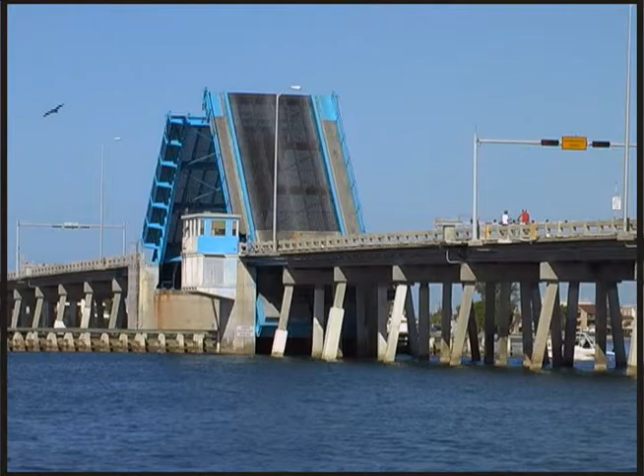Welcome to the Alternatives public meeting about a Florida Department of Transportation study to determine the future of Cortez Bridge on State Road 684, Cortez Road in Manatee County, Florida. The FDOT held a public kickoff meeting on April 30th, 2013 to introduce you to the Project Development and Environment, or PD&E study process.

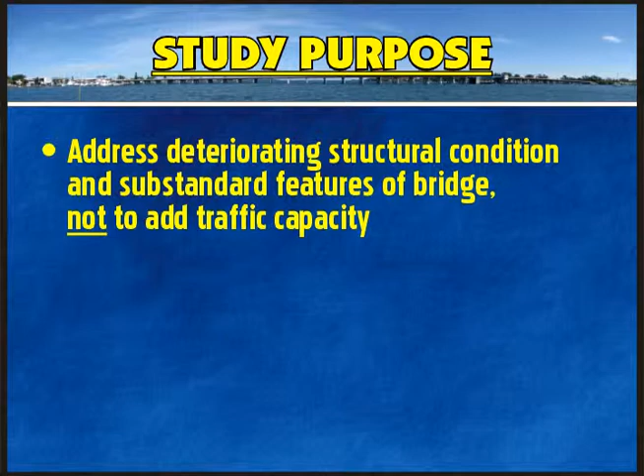We are following this process to determine the issues that are important to you as we conduct the study. The study limits are along State Road 684, Cortez Road, from State Road 789, Gulf Drive, to 123rd Street West, a distance of almost 1 mile. State Road 684 is a designated hurricane evacuation route. The purpose of the study is to address the deteriorating structural condition and substandard features of the bridge, not to add traffic capacity.

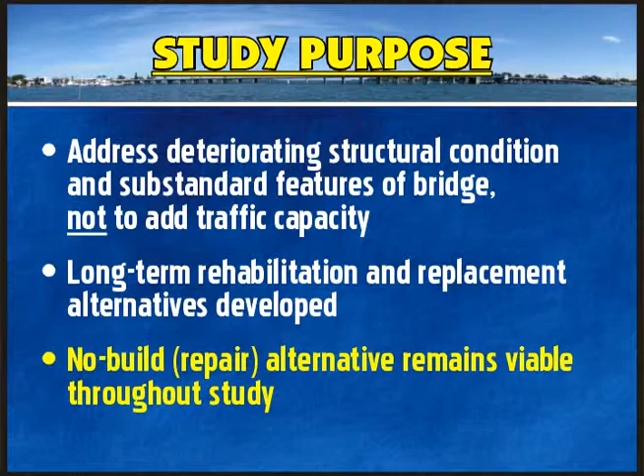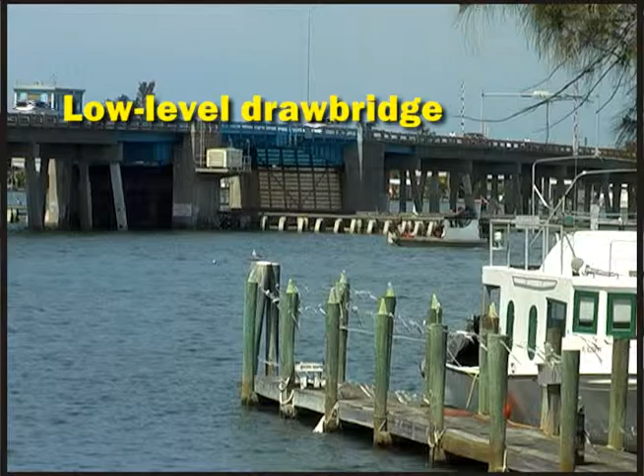The FDOT has developed long-term bridge rehabilitation and replacement alternatives. The no-build or repair alternative is also considered viable throughout this study. This PD&E study began in January 2013 and is scheduled for completion in summer 2015. It will conclude with a determination of whether the bridge is repaired, rehabilitated, or replaced. If the replacement alternative is selected, the type of bridge will be identified. An analysis of various two-lane replacement alternatives continues. FDOT is studying low-level drawbridge, mid-level drawbridge, and high-level fixed bridge designs. We also considered a tunnel alternative.

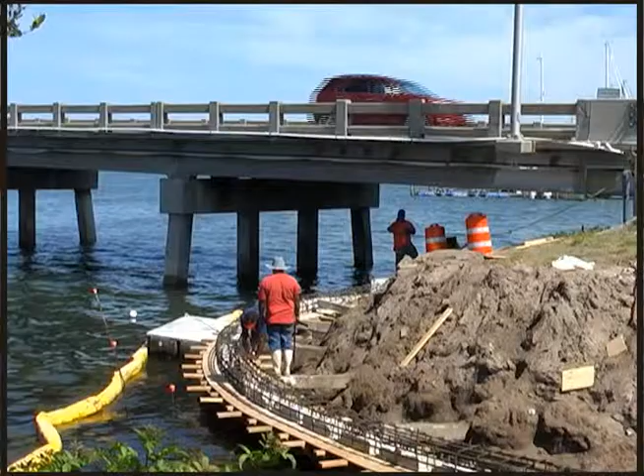The FDOT is currently doing a short-term repair project which began in May 2014 to keep Cortez Bridge safe and operable for up to 10 years, or until 2025. Please speak with an FDOT representative for more information about the repair project.

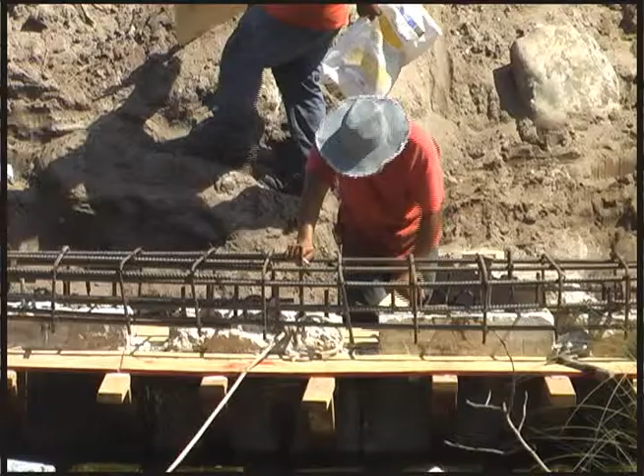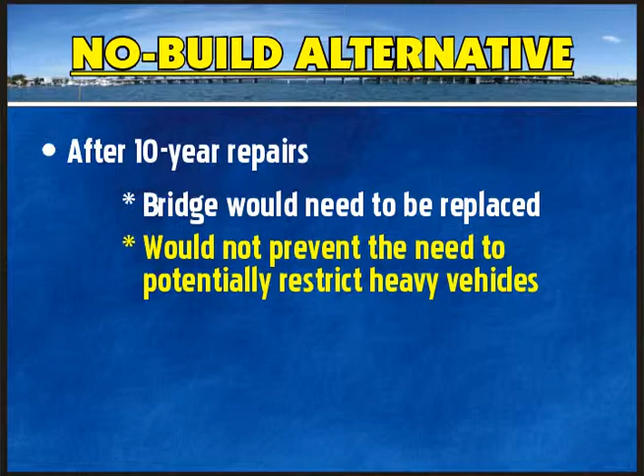Now, let's describe the alternatives under consideration. First, the no-build or repair alternative. While no one can precisely predict how long repairs will last, the no-build repair alternative includes continued repairs and routine maintenance of Cortez Bridge to keep it safe and operable for up to an additional 10 years following the current 10-year repair project, or until 2035. After the 10-year repair, the bridge would need to be replaced. The no-build repair alternative would not prevent the need to potentially restrict heavy vehicles, meaning that heavy trucks such as commercial delivery or moving trucks could be restricted.

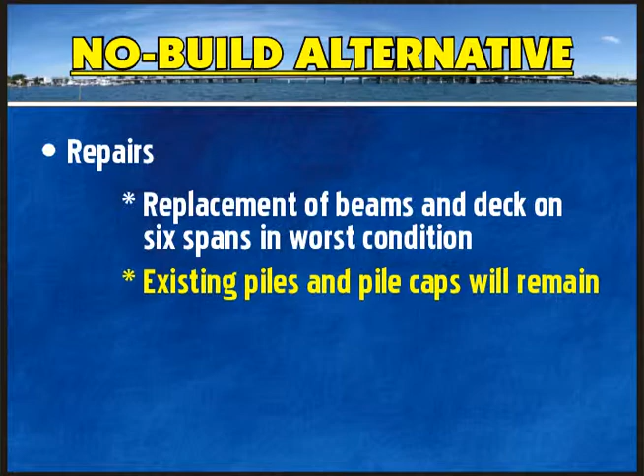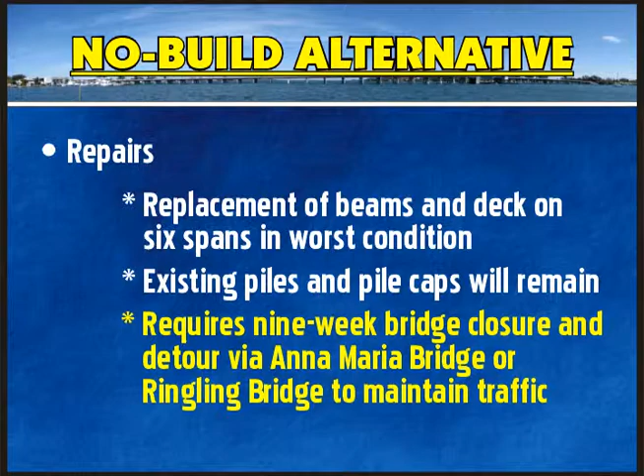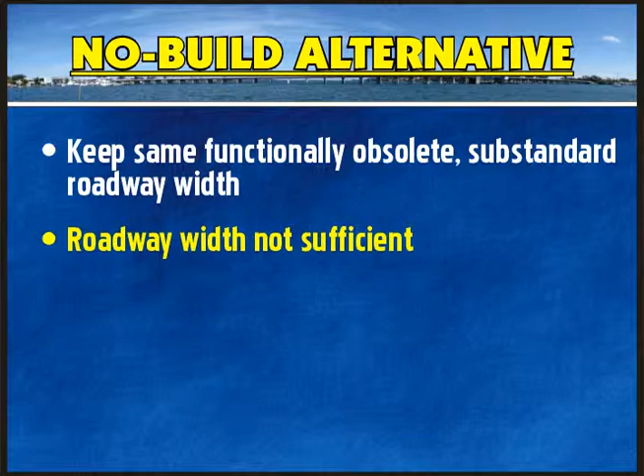Repairs include replacement of the beams and deck on the 6 spans in the worst condition to address beam deficiencies. The existing piles and pile caps will remain. The no-build repair project would require closure of the bridge for 9 weeks and a detour via Anna Maria Bridge or Ringling Bridge to maintain traffic during construction. The no-build repair alternative will keep the same functionally obsolete substandard roadway width. The roadway width is not sufficient to provide any shoulders, and the brush curbs do not meet current safety standards.

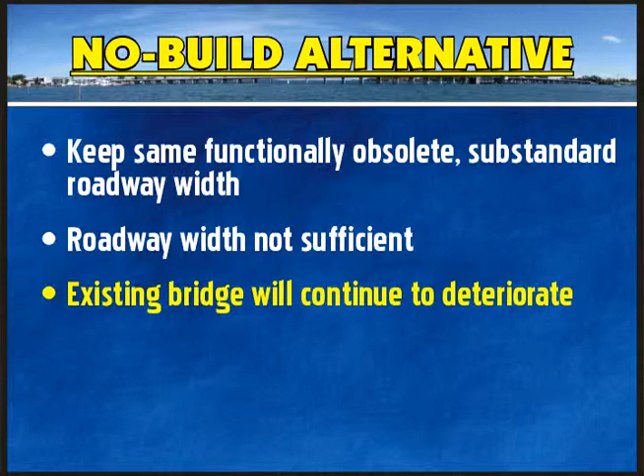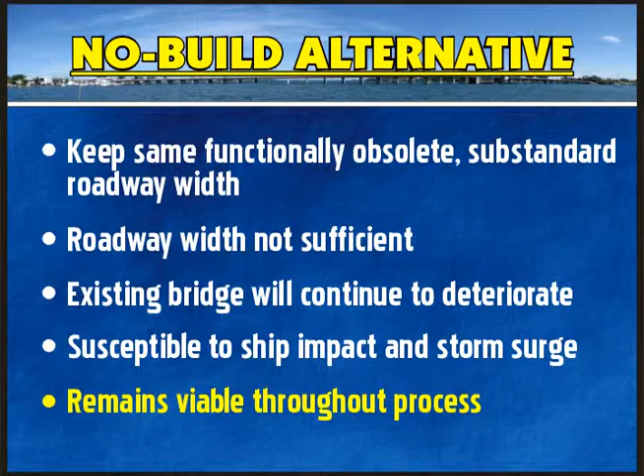Despite repairs, the existing bridge would continue to deteriorate. Furthermore, the bridge would remain susceptible to damage from ship impact and storm surge due to its substandard foundations and low profile, respectively. The no-build repair alternative will remain viable throughout the analysis and evaluation process.

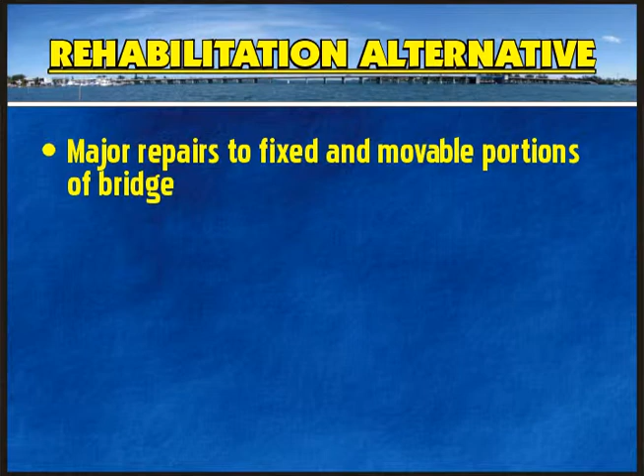Next is the rehabilitation alternative. The rehabilitation alternative includes performing major repairs to the fixed and movable portions of the bridge. While no one can precisely predict how long these repairs will last, the rehabilitation alternative is intended to extend the service life of the bridge for up to an additional 25 years following the current 10-year repair project, or until 2050. After the 25-year rehabilitation life, the bridge will need to be replaced.

The rehabilitation alternative was evaluated after FDOT conducted an extensive inspection and testing program. Rehabilitation includes the complete replacement of all the beams and deck to address their condition and improve their reliability. The existing piles and pile caps will remain. However, the rehabilitation alternative would keep the same functionally obsolete substandard roadway width.

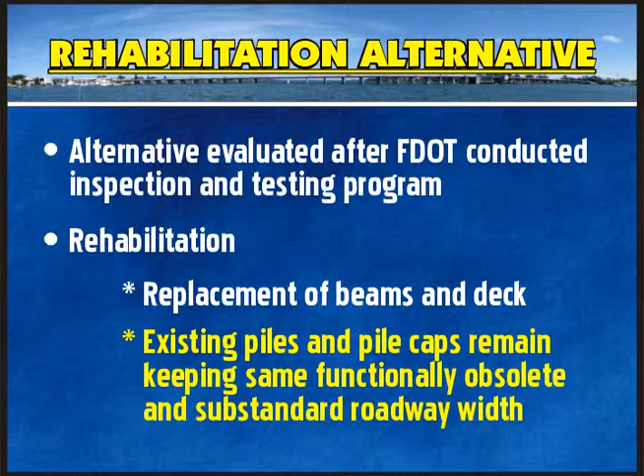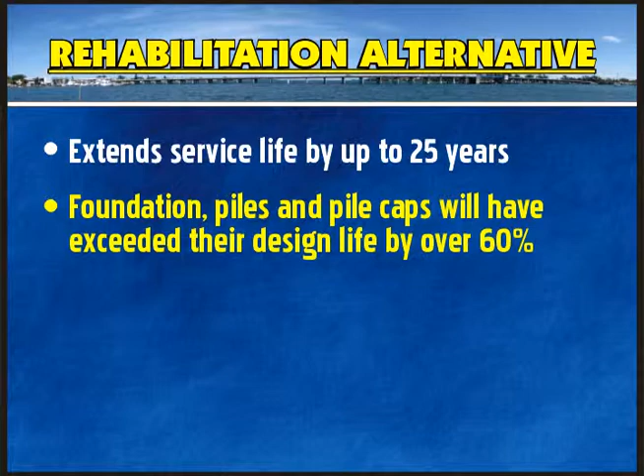The original piles and foundation would remain and would continue to be affected by the extremely corrosive saltwater environment. Additional repairs would be required periodically on the piles and other structural components to maintain structural adequacy. While the rehabilitation alternative would extend the service life of the bridge by up to 25 years, the foundation, piles, and pile caps will have exceeded their design life by over 60% in those 25 years. The bridge piles would continue to deteriorate, and the bridge would continue to be susceptible to damage from ship impact and storm surge, damage that, if severe, could close the bridge for several weeks.

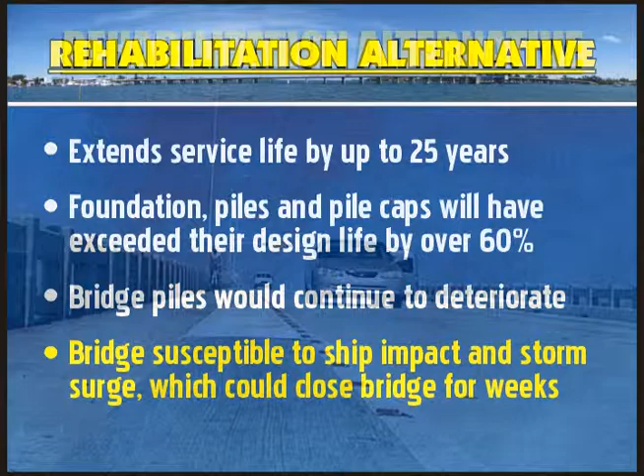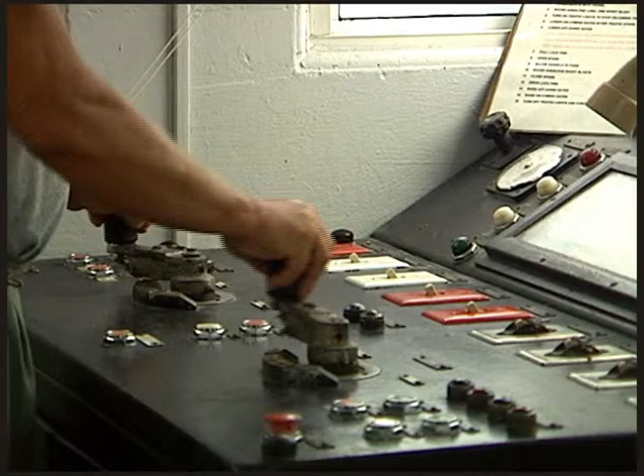The rehabilitation alternative will keep the same functionally obsolete substandard roadway width and brush curbs, since widening to accommodate additional shoulder areas is not viable due to the existing structural capacity and the capacity of the electrical and mechanical systems of the movable span. A temporary bridge is required to maintain traffic during construction, but the potential to restrict heavy vehicles would be avoided. The temporary bridge will also result in additional temporary construction and environmental impacts.

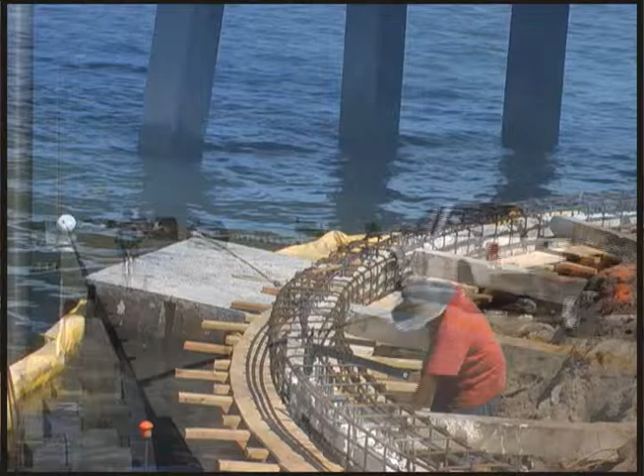The replacement alternatives provide a long-term solution with a 75-year life following the current 10-year repair project, or until 2100. Only a 2-lane bridge is studied because State Road 684, within the study limits, is classified as a constrained roadway by the Sarasota-Manatee Metropolitan Planning Organization. This means there are no long-term plans to widen Cortez Road within the study limits.

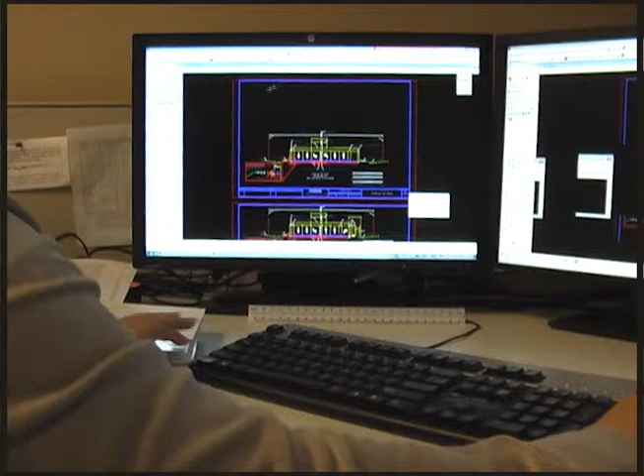FDOT developed a modern, typical cross-section for the replacement alternatives. It includes 2 12-foot lanes and 2 10-foot shoulders, which can accommodate bicyclists and disabled vehicles, providing more reliable and safer operations, including during an evacuation.

8-foot sidewalks are on both sides.

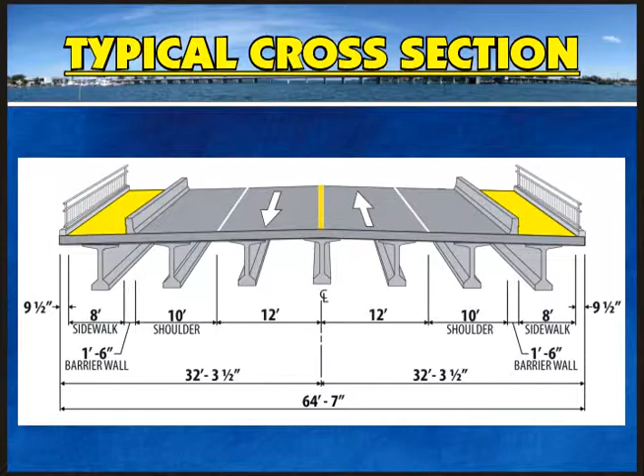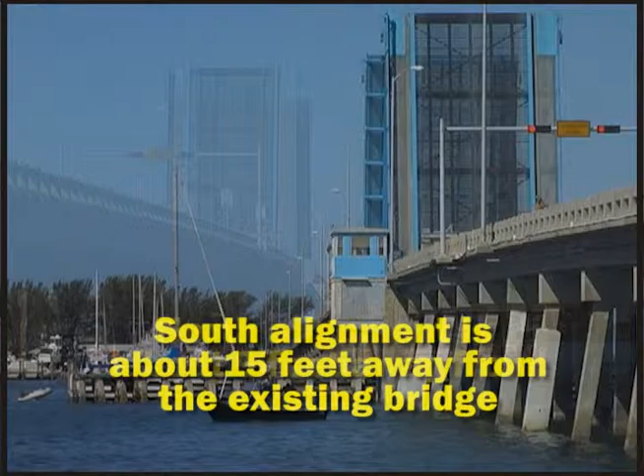Next, the study analyzed new bridge alignments within the existing corridor: a center alignment, a north alignment, and a south alignment. The north alignment is about 9 feet away from the existing bridge, and the south alignment is about 15 feet away from the existing bridge.

The project length is not significantly different for the alignments, therefore construction costs are not significantly different between the north and south alignments. The center alignment has been dropped from further consideration because it requires a long detour or a $14.9 million temporary bridge.

The existing vertical clearance of Cortez Bridge at the Intracoastal Waterway is 17.5 feet. U.S. Coast Guard establishes guide clearances at this location: a minimum 21-foot vertical navigational clearance for a new drawbridge, and a minimum 65-foot vertical navigational clearance for a new fixed bridge. The horizontal guide clearance for all bridge replacements is 90 feet perpendicular between fenders.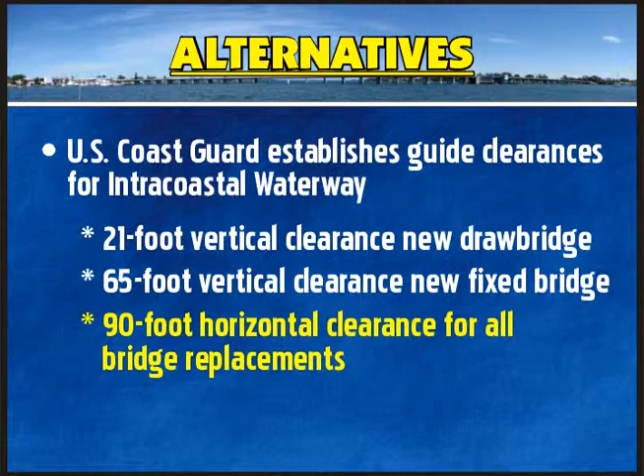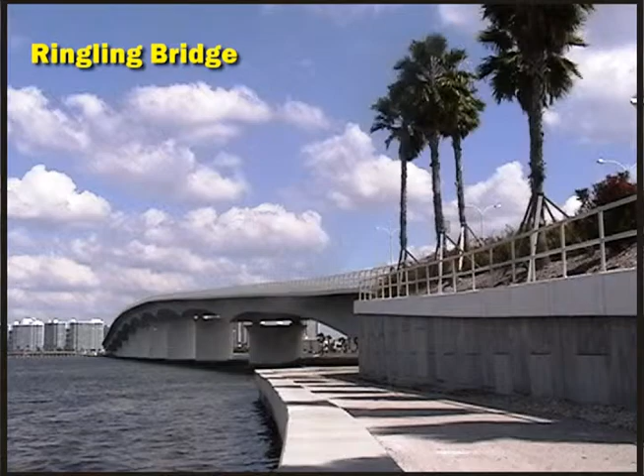However, we are considering a 100-foot channel, which is 10 feet greater than the existing horizontal clearance, to match the clearances at Ringling Bridge and the proposed Anna Maria Bridge. The wider channel will be safer and allow vessels to pass through the channel faster.

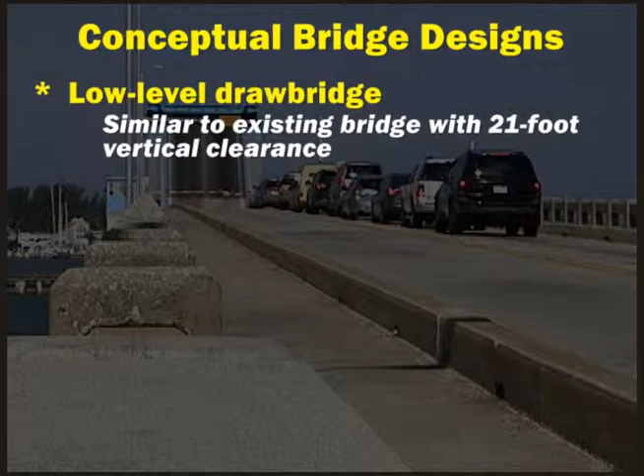FDOT has developed the following conceptual bridge designs: a low-level drawbridge, similar to the existing bridge, with a 21-foot vertical clearance when the bridge is closed; and a mid-level drawbridge, with a 45-foot vertical clearance when the bridge is closed.

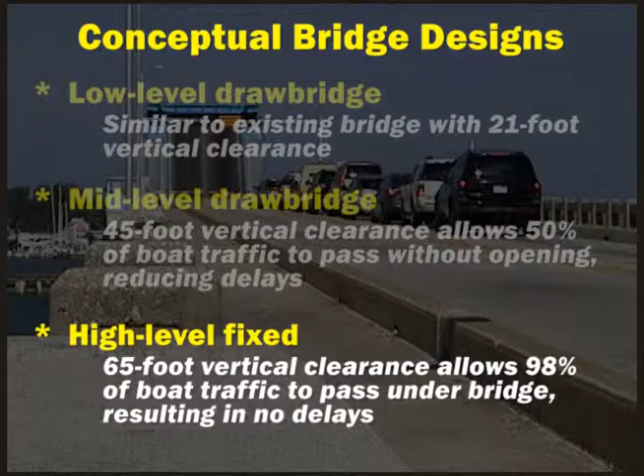The higher clearance allows about 50% of the boats that currently require the bridge to open to pass underneath without opening the bridge, potentially cutting the number of openings by half and reducing delays for vehicles and vessels. A high-level fixed structure with a 65-foot vertical clearance allows 98% of all vessels that currently use the channel to pass under the bridge, resulting in no delays.

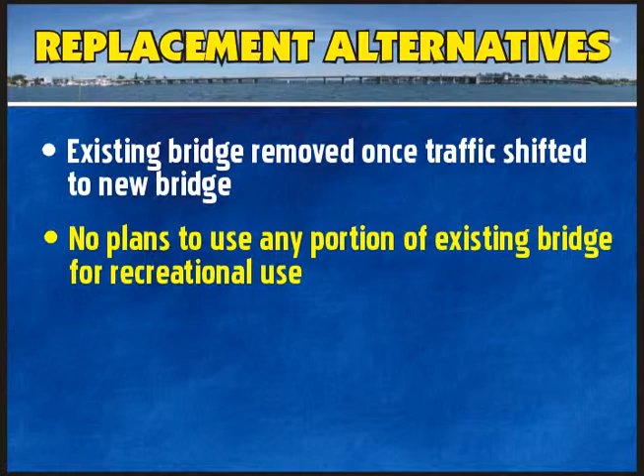All bridge replacement alternatives include removal of the existing bridge once traffic has been shifted to a new bridge. If the replacement option is selected, there are currently no plans to leave any portion of the existing bridge for recreational use. The combination of 2 alignments and 3 bridge replacement heights results in 6 bridge replacement alternatives.

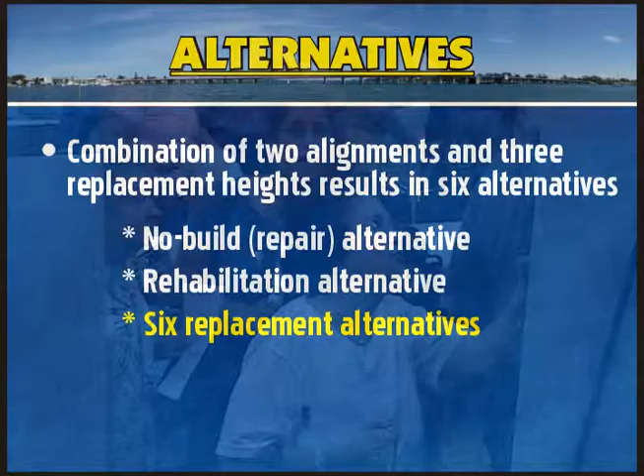In order to quantify the costs and potential impacts associated with the alternatives, FDOT analyzed the no-build repair alternative, the rehabilitation alternative, and the 6 replacement alternatives. The results are included on the Alternatives Analysis Matrix poster board and in your project handout.

Aerial photographs with the alternatives are displayed for your review. Representations of the bridge heights are also displayed.

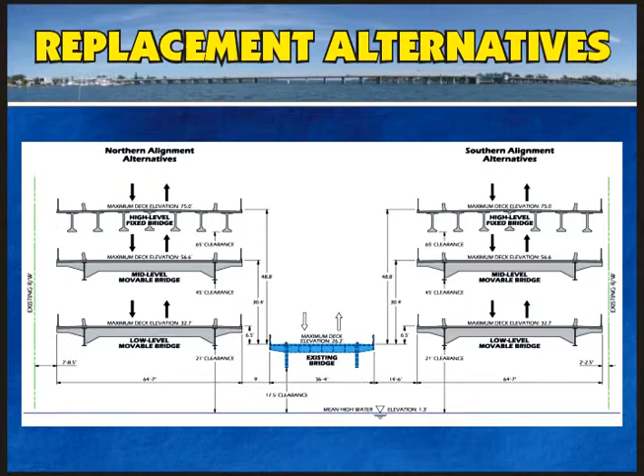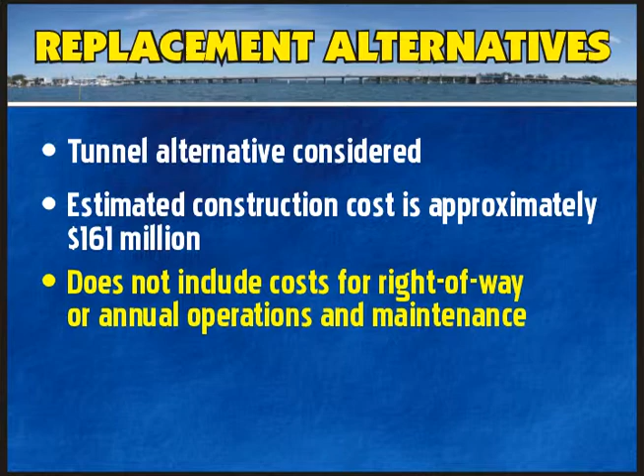FDOT considered a tunnel alternative. The estimated construction cost for a tunnel is approximately $161 million, not including additional costs for right-of-way or annual operations and maintenance. Based on this estimate, the tunnel alternative cost far exceeds the cost of any of the bridge replacement or rehabilitation alternatives.

The study team also considered environmental effects resulting from the tunnel alternative, possible effects to the natural environment caused by dredging, and the high cost of a tunnel. Among other factors, these resulted in elimination of the alternative from further consideration.

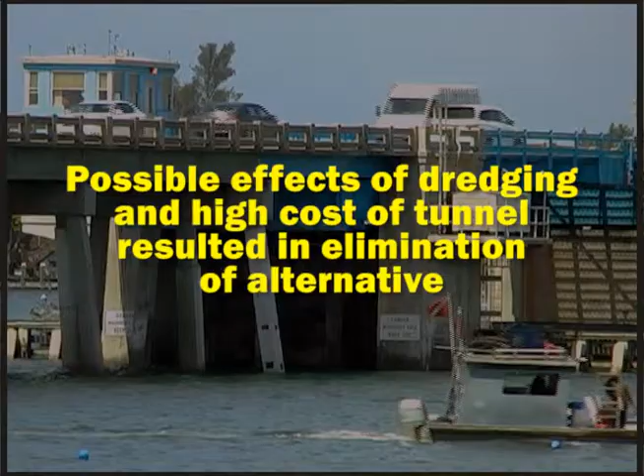Analyses of the social, cultural, natural, and physical environments that surround the bridge are an important component of this study. Environmental effects that are studied include wetlands, seagrasses, floodplains, threatened and endangered species, water quality, hazardous materials, recreational sites, historic districts, historic structures, and archaeological sites. No significant effects are expected as a result of any of the alternatives.

Effects are listed on the Alternatives Analysis Matrix display board and in your project handout.

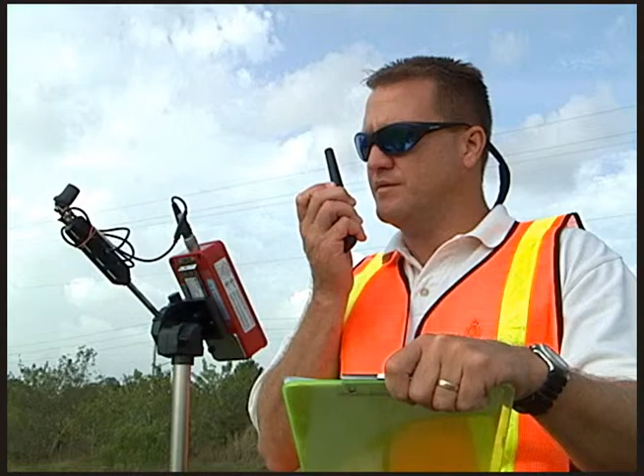The department will review comments received as a result of this alternatives public meeting and, together with the engineering and environmental analyses, refine the viable build alternatives. Then we will conduct a thorough analysis of potential environmental effects and document the findings in several reports. We also will continue coordination with local governmental entities.

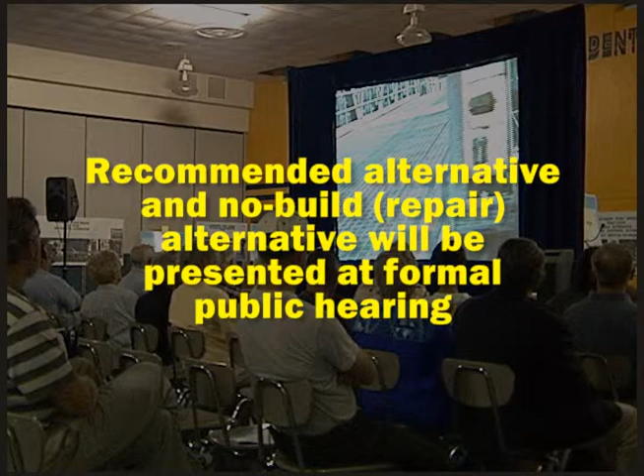The recommended alternative and the no-build repair alternative will be presented at a formal public hearing where your comments will be solicited again. The hearing is tentatively scheduled for spring 2015. Following the hearing, FDOT will submit the recommended alternative for approval to the Federal Highway Administration, the lead federal agency for this study. The engineering and environmental study of Cortez Bridge is scheduled for completion in summer 2015.

The design phase for further repair, rehabilitation, or replacement of Cortez Bridge is scheduled to begin in fiscal year 2016. Right-of-way acquisition, if needed, and construction phases are not funded in FDOT's adopted 5-year work program for fiscal years 2015 through 2019.